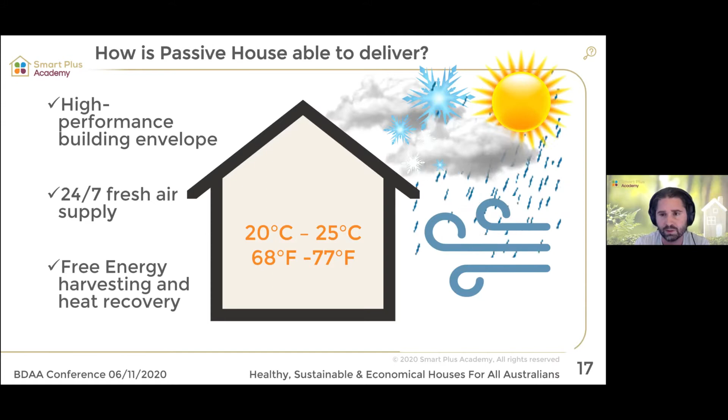So let us talk a bit about health. Why is health so important? Why is health and homes so related to each other? Because we're spending over 90% indoors and only 10% outdoors, and this indoor environment is not our natural habitat. It's an artificial environment that we are creating. So we must make that as healthy and comfortable as possible. That's the reason why health is so important, because we're spending our life in our boxes that we're building.

Then the next one, sustainability. When we look to the impact of the different industries, we see that the building industry has an impact of 39%. 17% is the residential building, 11% is the commercial buildings and their use, and 11% is the building industry itself to create our infrastructure and our buildings. This is the reason why the building industry is the solution to fight climate change. We are the solution, guys. You choose the field that is making the difference. We are the ones that are able to save the planet and make sure that the generations to come still have a planet like we know it.

Then the next one, economics. When we look to our buildings, we see that heating and cooling is 40% of our operational costs, and 21% is our hot water cost. This is exactly what Passive House is tackling, it's tackling the 40% and the 21%. Overall, Passive House is able to cut the energy, or the household running costs, by 50%.

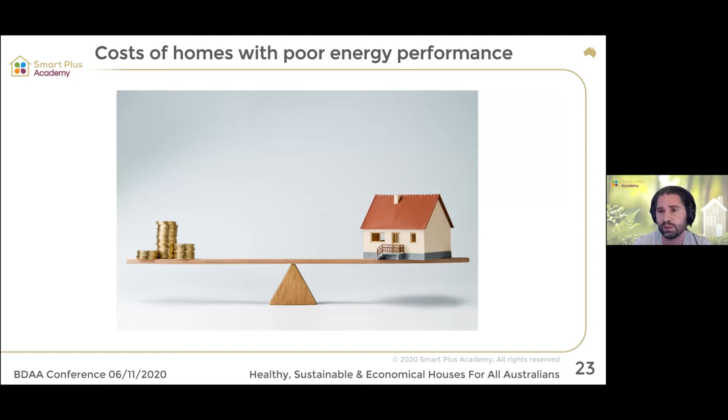So what are the findings of this paper? What's the cost of poor energy performance in our buildings? Obviously higher energy bills, and we see that with really simple upgrades, not even passive house upgrades, we're able to cut the prices down by 50%. In ACT, they spoke of a saving of $700 a year already.

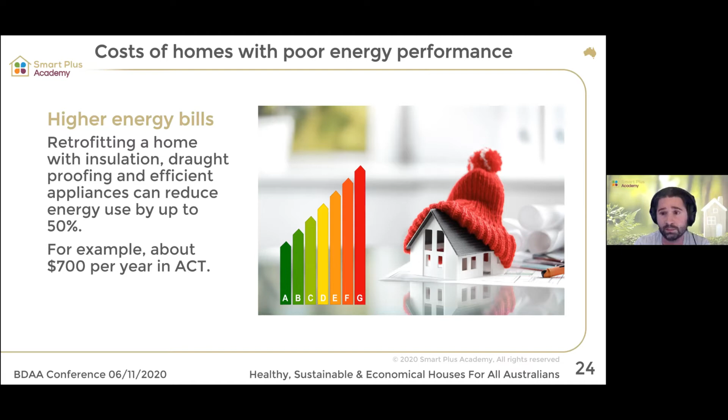The next thing we have to speak about, because it's related, is increased mortality. 6% of Australians die because it's too cold, and 1% die because it's too hot in their buildings. 7% of the deaths that are happening could be avoided by actually building passive houses. So it's something we need to talk about and really see. If you look at Sweden, it's only 3.9% compared to 7% in Australia, something is wrong there. The Swedish climate is far harsher than the climate here in Australia.

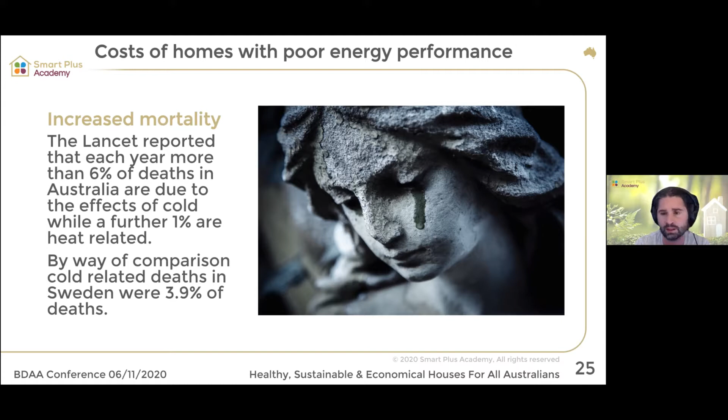Other impacts, when we look more globally, we know that 7 or 8% of the asthma burden in Australia, with children aged 14 or under, is associated with damp housing.

Again, like asthma, it's a little bit ridiculous. I figured out a few months back that I actually have asthma. I was wondering why I don't get energy, why I'm not feeling well, why my digestion system wasn't working properly, and I'm teaching that stuff. I didn't even know I had it. Then I just took this easy spray, and my life is good again. Asthma has a lot of aspects to it, there's a real mold related aspect and building environment aspects, but also a psychological one, though we're not going there in our presentation.

In New Zealand, New Zealanders living in insulated houses have a 50% less likelihood to have respiratory symptoms than those living in uninsulated houses. So we see people living in insulated houses, not even passive house, just really simple improvements, already improving by 50%. In Europe, we know there's a 40% higher likelihood to develop asthma if you're living in a damp and moldy home.

In the US, 21% of asthma cases reported are attributed to dampness and mold exposure in homes. So that's something we really need to be aware of.

Then there's the increase of public health spending. So we see here the spendings on the right. Asthma alone in the year 2015 was costing 28 billion - just asthma, 28 billion for treating asthma. And all the other lung-related diseases cost 98.2 billion in the year 2008. This is expenditure that our society is paying, and we can really reduce that by building better homes.

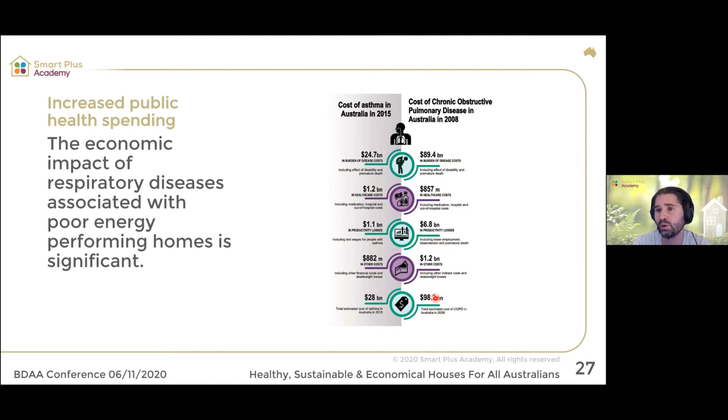So why are buildings so impactful? Because we're spending 90% of our time in there and only 10% outside in the natural environment. So there are only two health criteria that we need to fulfill in buildings. The indoor comfort needs to be no health risk, and the indoor air quality needs to be no health risk. So these are our two criteria that we need to fulfill.

So indoor comfort - let us talk about indoor comfort first. When we speak about comfort, we have to keep in mind that we are all humans with the same needs. What I mean by that is our body temperature. My body temperature is around 37 degrees, probably a bit higher right now with all this craziness happening. But it doesn't matter if I'm living in Sydney, Hobart, or Darwin - doesn't matter on the climate zone we are living in. We are humans, and our body temperature is around 37 degrees, and this is everywhere the same.

So comfort is health. Why is comfort health? Because first it's comfortable, then it's uncomfortable, then it's unhealthy, then it's a health risk, then it's a health threat, and then it kills us. Simple as that. Comfort means that the body sensors are telling us that we are not under stress. Comfort tells us that everything is fine with our system. Comfort is a health requirement.

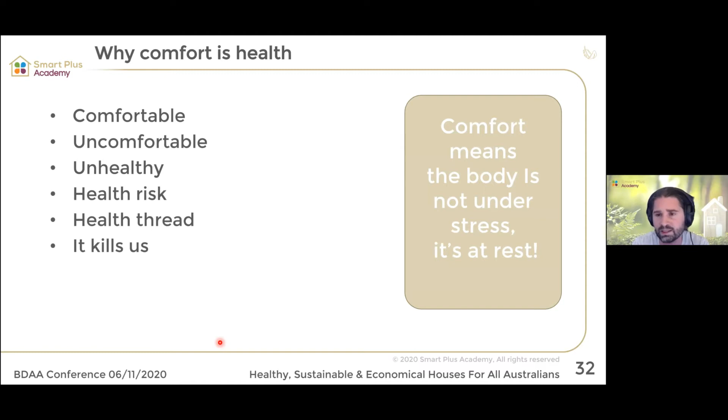We're all having the human needs, we're all having body temperatures around 37 degrees - it's not dependent on location - and we have the need for comfort. So what is comfort? Comfort is defined in the study by Ole Fanger in 1970.

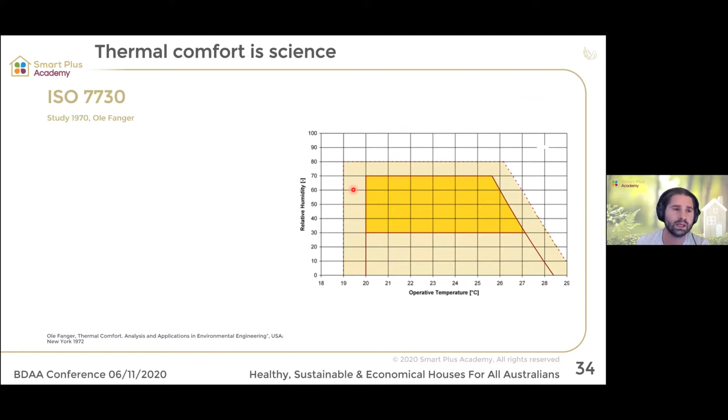He was putting a lot of people into an environment and then tested them. The outcome was that the comfort zone is between 20 degrees and 27 degrees, with a relative humidity of 30% to 70%. So what does the comfort zone depend on? Air temperature, radiant temperature, and relative humidity - these are the main ones that are really important.

In a passive house, we are stricter than the general comfort zone. We say in passive house that we stay between 20 and 25 degrees, and a relative humidity of 30% to 60%. Could you guess why we don't allow temperatures of 27 degrees? We are sleeping in that place, and the comfort zone is for awake people. If you're awake, you could be comfortable at 27, but if you try to sleep at 27 degrees, you're for sure not getting the rest. You might be able to sleep, but you're not getting rest and not able to recharge your batteries. So this is the reason why we only go up to 25 degrees.

And then the relative humidity is as well a comfort reason, but also a health reason, because 70% is too close to the mold risk at 80%. So there's another reason for only 60% as well. So passive house stays, like I said, between 20 and 25 degrees and a relative humidity of 30 to 60%.

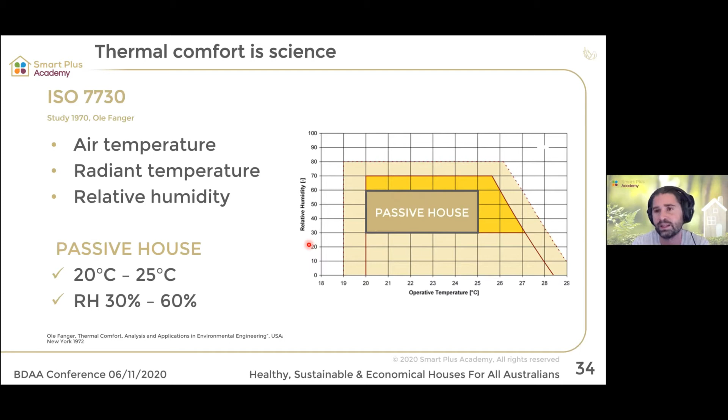So for thermal comfort, if you're staying in this comfort zone between 20 and 25 degrees, then 92% of humans are feeling comfortable. There's always a few people you can't make happy - we're humans, there's always somebody out there that's not satisfied. But with 92% satisfaction, we are already happy. Like I explained, sleep is why we're not going higher than 25 degrees.

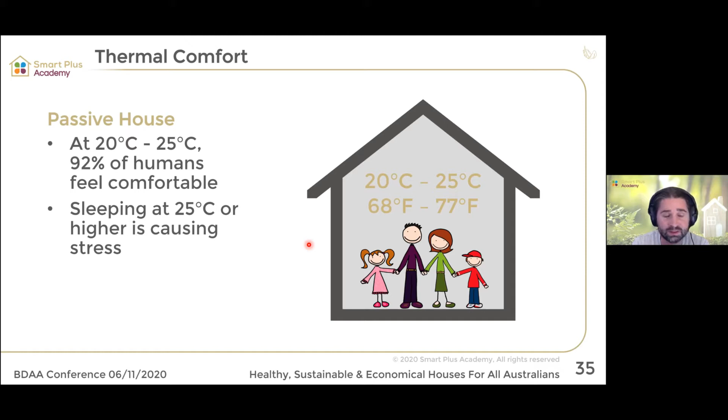So let us now go into indoor air quality. For this, let us see if that works. I would like to share with you a little video, and I hope that we are able to play that now.

You will decide how this story ends. This is a story about us, the indoor generation. A generation that spends 90% of its life indoors.

It all started the day we left nature behind. We filled our homes with lovely things and all the stuff we wanted. Our homes became places we would never want to leave.

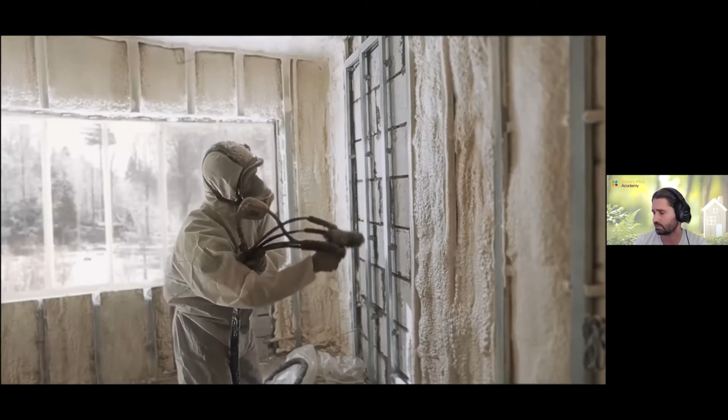Artificial light replaced daylight, and we built our houses so that nothing could escape. We cooked and showered, breathed and played, slept and sweated. But we had closed ourselves in to a point where nothing could get out.

So when the air turned bad inside, we tried fixing it with chemicals. And we put in little artificial suns everywhere to make the darkness bearable. That's when things started to happen. Hard to notice in the beginning.

Some needed help to sleep, to breathe, to not itch. Many of us even started to feel sad. So we turned on happy lamps to make the sadness go away.

Then, scientists discovered that the air inside our homes is up to 5 times more polluted than the air outside. And that the lack of daylight can affect children's learning and increase blood pressure. It turns out that kids' rooms often have the highest concentration of toxicants in the house. In fact, millions of homes are unhealthy to live in.

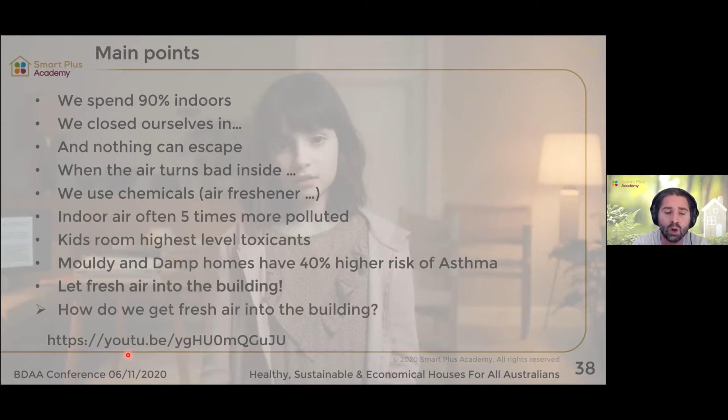So we have to let fresh air into the building. So how do we get fresh air into the building all the time? So now, how is the air quality in your home? Do you know it? Do you measure it?

Maybe something to consider. Yeah, so the air quality is something that we often don't even feel and notice. So it's something that we need to measure. Our senses are not designed for measuring air quality and carbon dioxide concentrations.

So there are now harmful substances, and we will cover mold, particles, and carbon dioxide. There are more of them, like the VOCs, radon gas, and odors.

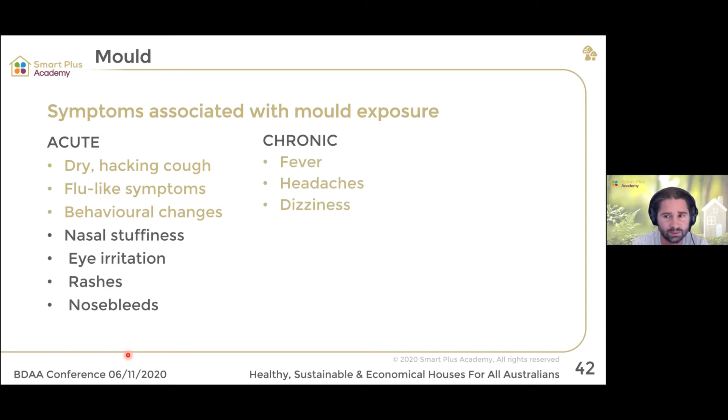Yeah, so for mold to form, there are only 4 things that are needed. It's nutrition—mold needs food. It's a living being, so it needs energy. It needs a source of life, it needs spores. Yeah, and we always have that around. There's always spores out there. There's always energy.

We could get rid of energy by living in a freezer, but that's not in our interest. We want to live at 20 degrees. Nutrition, there's always some dust particles around. So these three things are not really controllable. The only thing we can control is the moisture.

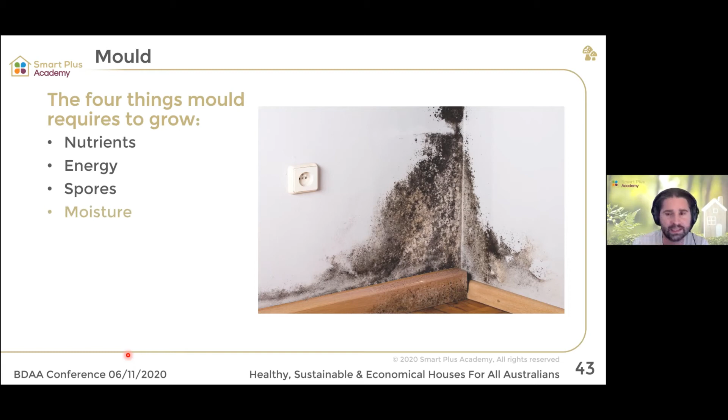And that's exactly what we do in a Passive House. So that mold can form, the mold risk needs to get high, it could form earlier. We need a relative humidity of 80%. In a Passive House, we make sure we're not reaching this 80% relative humidity, and that no surface or point has a temperature of 12.6 degrees anywhere in the building, because that's the temperature where we normally get the 80% humidity, and then already a potential mold growth.

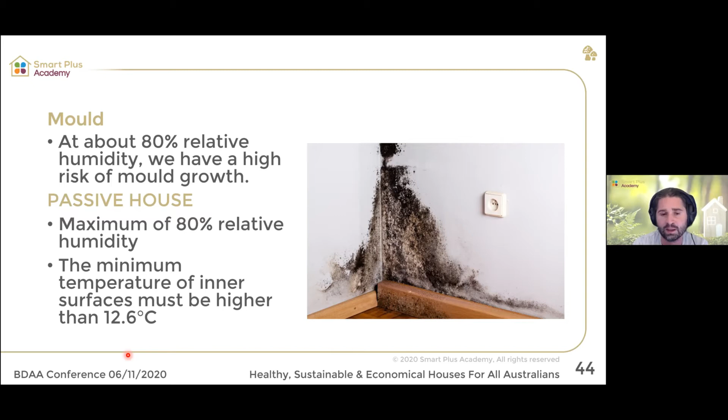Then other harmful substances, now the particle pollution. When we speak about particle pollution, something to talk about - now when we see masks, we're not necessarily talking about particle pollution any longer, thinking of other things, but I think it's still fitting.

So particle pollution - we can see here that diseases like heart attack and stroke are related to particle pollution, as well as respiratory diseases and asthma. We know that indoor air is causing 3.5 million deaths in the world, and 3.2 million is outdoor air causing it.

It's not looking too good for Australia. If you look at where the deaths are happening, obviously there's Asia in there as well, so it's not only Australia. But we really have to look out for that.

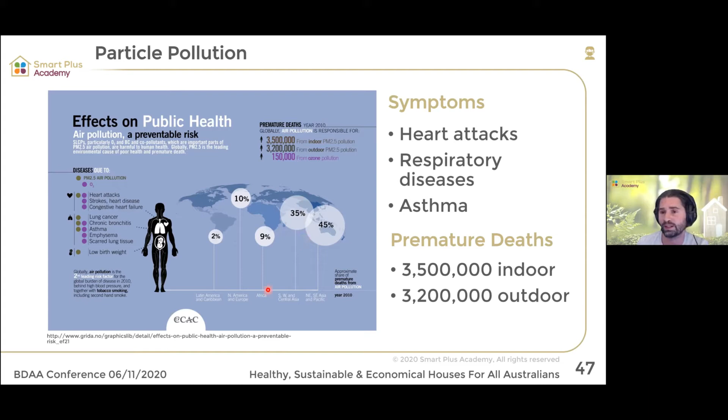So when we speak about particle pollution, we have to look at certain causes: cooking processes, cigarette smoke, exhaust fumes, tire abrasion, bushfires obviously, and dust storms. So mainly it's outdoor sources that are causing the particle pollution in buildings.

Now, a Passive House has an F7 filter that takes out particles larger than 0.001 millimeter in diameter. That's what a heat recovery ventilation system does - it uses an F7 filter to filter the air, so particles are already looked after.

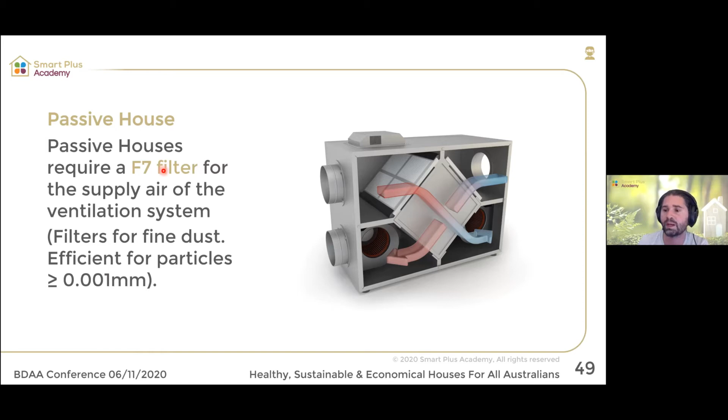One thing I want to point out is bushfires. Who didn't experience bushfires and problems with it? I was sitting in my apartment, my eyes were itchy, I had a cough, I didn't feel well at all when the bushfire season was on. And I had no control over my home or my office.

So we need to be able to separate the indoor environment from the outdoor environment to make sure that it is healthy and safe in there.

I don't know if you know, but we had false fire alarms going off in buildings, whole office blocks in the CBD, in the city of Sydney, and other places. So what did they do? They switched off the fire alarms because the alarm was going off the whole time, and it was before COVID, so nobody was going home, and home office hasn't been seen as an option. So now everybody is in a building with switched off fire alarms - or maybe it's not even switched off, but they say, yeah, it's only the smoke.

Imagine now there's really a fire - a 50-story building, and everybody thinks it's just a false alarm, or the fire alarm system is already switched off, or the fire brigade is busy because of false alarms around the whole city, and they're not coming to the real fire. So it's really something that needs to be discussed.

So here, this is my apartment in Manly, and you see here this 50 micrograms per cubic meter, this red line. Soon we are crossing that line, it's out of the healthy zone. So if we're staying below here, we normally say that's not a problem. Soon we're coming above that level, then we are in the unhealthy zone. And you see how that was going crazy - it went up to nearly 14 times the levels that would be seen as okay.

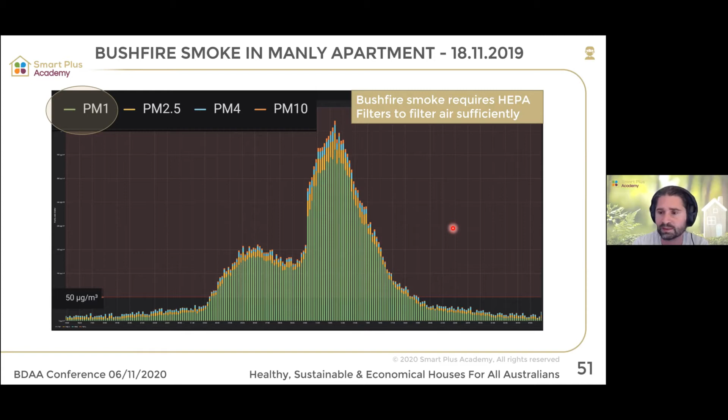So now, next one is carbon dioxide. Let us talk about carbon dioxide. Do you know your carbon dioxide levels in your building?

Probably not. The outer air has about 400 parts per million. We are now obviously at 420 already because the parts per million are increasing. We say normally in a building, 1,000 parts per million is good air quality, and above 1,000 parts per million we normally say it's harmful for us already. Above 5,000, we say it's toxic. So we still have some play before toxic levels, but above 1,000 we shouldn't be there.

So in a passive house, if it's set up properly, then we never have levels above 1,000 parts per million. Passive house is looking after that. So where is carbon dioxide coming from? Obviously from people, from animals, household chemicals, open flames like gas cooking, and cigarette smoke.

Who did not have that issue before, that you had 8 hours of sleep, and you woke up and thought, I don't feel rested at all? Could it be that your CO2 levels are a little bit too high, and that they're actually not giving you the rest and the oxygen, because oxygen is the fuel of life. That's the energy, where the energy is coming from. So if you're not getting enough oxygen, if you're not able to burn it, it's not working.

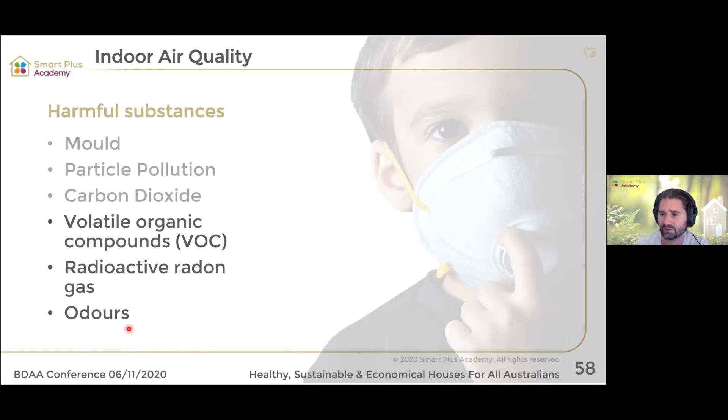So how do we get fresh air into our buildings, and how much fresh air do we actually need? From studies, we know that every person needs 30 cubic meters per hour of fresh air in the building. Window ventilation is not sufficient - this is already known. Going into the details would take too long, but you'll see that in the longer version on the website.

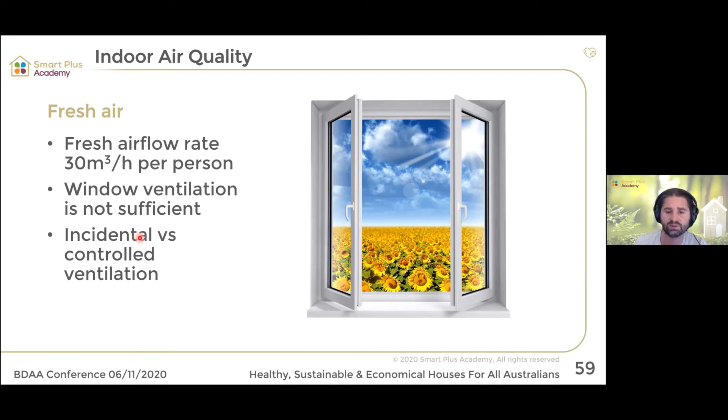Incidental versus controlled ventilation: incidental ventilation needs an incident, like a pressure difference between inside and outside, a temperature difference, or wind. We have an incident, but nature doesn't provide us a constant force we can use to ventilate the building, so we don't have controlled ventilation. For this, we need mechanical ventilation.

Passive House requires a heat recovery ventilation unit. Now we're getting provided fresh air 24/7, and the air gets filtered, reducing dust and allergies. Especially for somebody with allergies - hay fever is another thing I suffer from.

Obviously I want to live in a passive house as soon as possible because of knowing the benefits. All my clients that I've worked with in the past, and that I still have contact with, tell me their health issues decreased by living in nearly passive houses, not even full passive houses - their skin rashes went down, their asthma left completely, lung problems and coughing were all gone. It's pretty amazing, and everybody I was still in contact with had that experience.

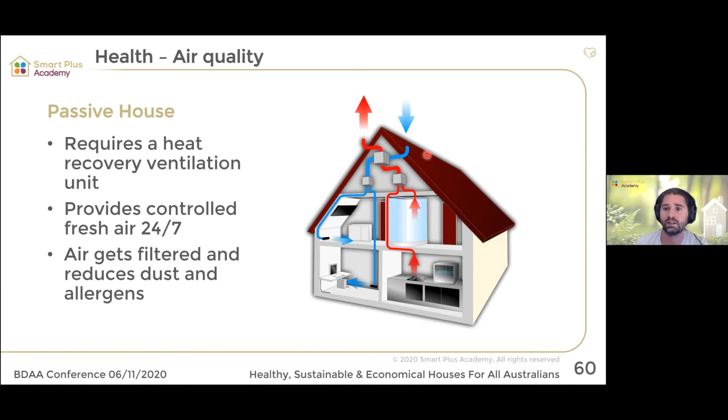So let us recap health for a second: we're spending over 90% of our time indoors. The indoor environment should not give any cause of health risks. The indoor climate must be comfortable - we need to stay in the comfort zone so we're able to get the rest we actually want. So let us now move over to sustainability.

You realize I spent a lot of time on health because a life without health is not worth anything really - it's really reduced. If your health is not well, then your life is really not there - you don't have that energy. So please look after your health, the only one you're having. Just reaching out to you again - I wouldn't like to hear that when I was in my early 20s or so.

Okay, sustainability. Let us go into sustainability, and I will make that now really visual for you. Probably you've never heard sustainability explained in the way I'm explaining it to you, and I think it's a really good way of looking at it.

When we're looking at the everyday impact of us, we know that looking at our landfills, every person in the world puts 0.5 kilo of trash into landfills every single day. If you're now looking at CO2, that's 15.5 kilograms of CO2 every single day that we're putting into the atmosphere - in other words, 31 times the rubbish you see lying around is actually going into the atmosphere. All the rubbish in your rubbish bin that you're putting out there - that's 31 times that amount going into the atmosphere.

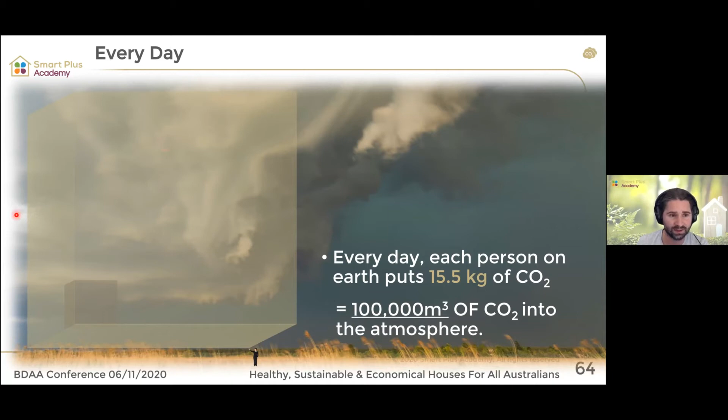You see this little figure here? That's a human. This cube that you're seeing here, that's the volume of CO2 that we're putting into the world every single day. This here is a 2-story building, this square. Yeah, this is the impact that we're having.

And people say that that is not having an impact on our environment. I don't know where they're living. It has to have an impact.

Now here in Australia, because we're living in the first world, we have to expect that we're putting 1 to 2 times our body weight of CO2 into the atmosphere every single day. This must change, guys. This really must change.

So we're always having this argument that the CO2 levels were always going up and down, and there's no proof of global warming, all this BS talk out there. Yes, it has been moving in the last 800,000 years up and down, from say 150 parts per million up to 300 parts per million. That is the shift that was naturally occurring.

Since industrialization was happening, we went up to over 400 parts per million. In other words, we added a third more CO2 into the atmosphere than what is normally naturally occurring. We're having a massive impact on our climate with the CO2 that we're putting into the atmosphere.

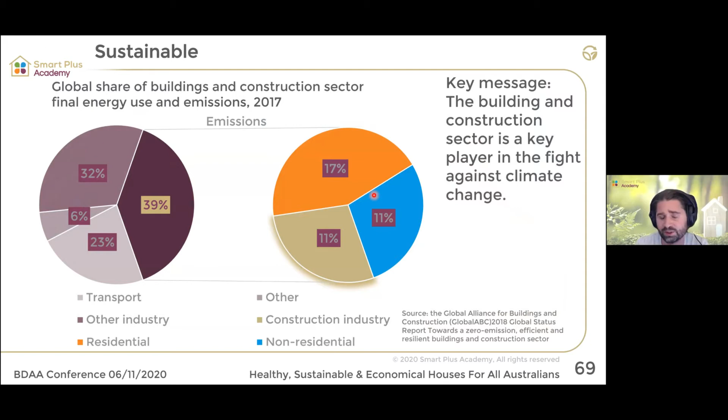So we are the solution. We can make a difference, and it's so super easy. Passive House shows it. It's not rocket science. We just have to do it.

And then we know as well that buildings are the biggest investment of our lifetime, and as well the biggest ongoing costs that we're having every single year for actually operating our buildings. So that is what Passive House is able to cut in half.

So when we speak about sustainability, we have to be smart. It makes no sense to get into trying to save the planet without being smart about it. We have to be smart, and smart means we have to think about economics.

And here we really have to speak about what it costs us. What is the cost of actually saving it? And here we come to reduce, produce, store. First we have to reduce, then we have to produce, and then we have to store.

Every kilowatt hour that we don't need to produce, and we don't need to store. And every production and every storage has losses. So reduction is the key.

Performance first, guys. The first thing that we have to achieve in our buildings is the performance first approach. That's really what we have to do. I said it already before, the building industry has the biggest potential for reducing CO2 emissions, not only from the quantity, but as well from the cost effectiveness.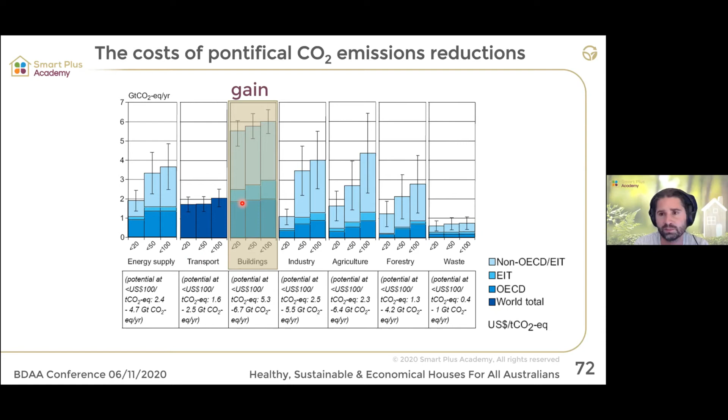So let us recap sustainability. Climate change is caused by us. Equal to 3 Hiroshima bombs of heat energy is getting released every single second in our oceans because of the CO2 that we put into the atmosphere, creating this glass house effect. Then the building industry and the use of buildings are responsible for 39% of the CO2 emissions.

What makes us the solution, guys? You choose the right field for your profession, if this is important for you, because here we can make massive differences.

Then energy savings - we can reduce the heating and cooling often by more than 90%. This is what we're able to do with the Passive House approach. And we can reduce the emissions by over 50% in buildings just by applying Passive House. We're gaining health and comfort. Passive House is the lowest hanging fruit to fight climate change.

Economically - so we're coming now to the economic side, and everybody is always saying Passive House is too expensive. It's total bullshit, guys. It's so not true. People that don't understand economics will say that, but Passive House is not expensive.

So let us look into the economics. Like we know already, buildings are the biggest one-off investment in our lifetime. They are the investment into our future, into our retirement. They're often seen as an investment, so we need to look at them as well as investment on that side.

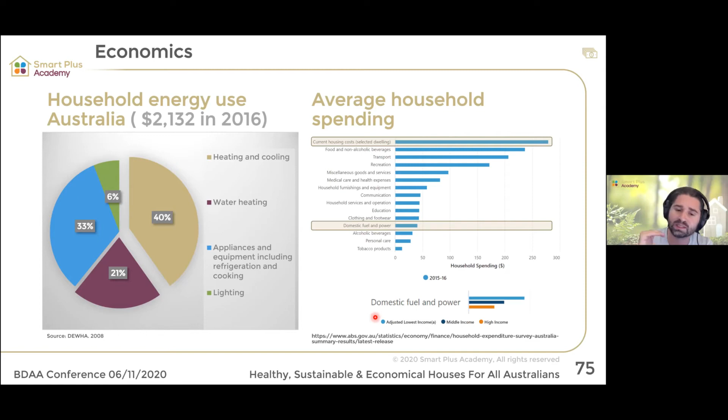So Passive House is ideal for social housing - it must be Passive House. Passive House is the lowest standard that we should build to, not the best standard. It's the lowest standard we should be building to. And Passive House can cut household energy in half.

So your home is the biggest one-off investment, the biggest ongoing cost - mortgage fixed and running cost, high fluctuation - and where you spend most of your life. You're spending 50% of your time in your home, and over 30% of your time in your own bed. The bedroom is the most important room in your building because you're spending so much time there.

Okay, so Passive House economics - let us talk about the low risk investment. Passive House is a low risk investment. Why? Because you're investing into quality. Passive House is quality. The difference to investing into quality is now burning fossil fuels - burning your money - instead of investing into fuel, into energy efficiency.

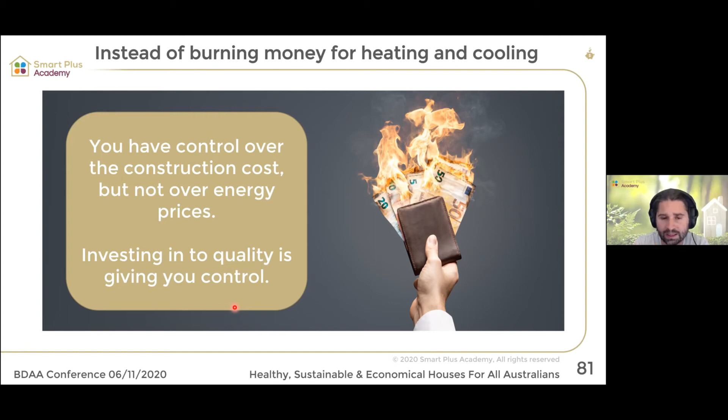And as well, when we're investing into quality, into performance, we are reducing the risk of fuel poverty. In Europe, we talk a lot about fuel poverty, that people are not able to heat and cool their houses any longer. Like in the UK, it's a really common thing that people can't heat their whole house, so they're only heating one room.

Here in Australia, I know families in the summertime, they're all sleeping in the sitting room because that's the only aircon they can afford to run, that split system in that room. They can't cool the whole house down, so they're doing that out of survival - the whole family sleeping under a small split system. I don't want to sleep with a split system running anyway, so it's not a solution for me.

In Spain, you have the older generation going into the shopping centers because they're climatized, they're cool. So now in the summertime, they're going in there to cool down. But what will happen if they're not healthy enough to leave their building any longer and they can't afford it?

Yeah, it's a death sentence. So we really need to look into that. And then there's a limited amount of breaking parts. Like here, this is what we're trying to do in the moment. Okay, we are losing something here, put something in here. So a lot of technology in there, and all that things could break.

A passive house, we just have a heat recovery ventilation system, a split system. You're using the sun, happy days. Like really low tech technology we can use in passive house. So it's a completely different approach.

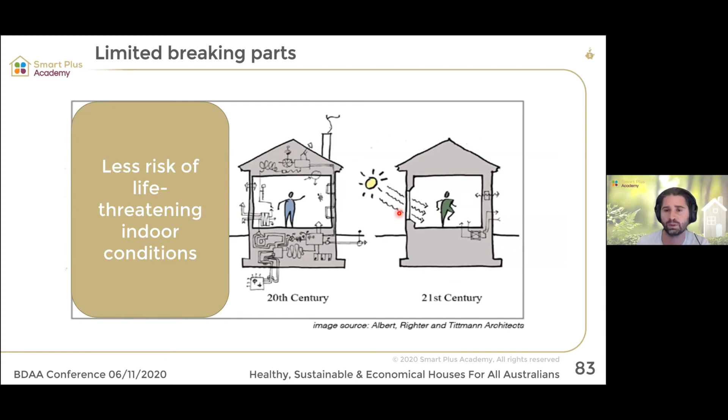Then it's a long-term return of investment. So long-term return of investment, in other words, passive house is your ideal investment into the retirement. Yeah, so it's the ideal investment.

So if you're looking now at a normal house that is operating at a temperature between 20 and 25 degrees, we can't compare apples with oranges. If you say now we look at the normal house that is not heated and cooled, but the temperature is now ranging from 8 degrees to 35 degrees, sorry mate, that's not comfortable. That's a health threat. So we have to compare apples with apples.

So that's the reason we say we look at a normal house that is operated at 20 to 25 degrees. We say it's a 200 square meter house and our energy cost increase is just 2% per year. So if you say our annual heating and cooling cost is 3,500 and our additional energy cost is 3,500, that's now operational costs for your fridge, your cooking and all that bits and pieces. So now we're coming here to $7,000 in year one.

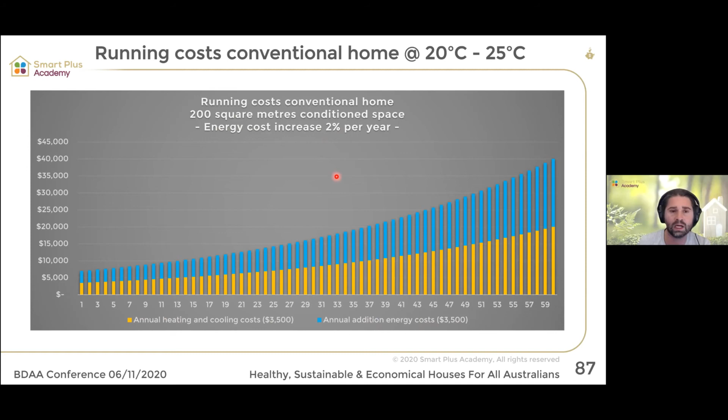After 60 years, we're already up here at what's that? $40,000. Yeah, so this is what is happening if you're building the way that we are living right now, and if you have an energy increase of 2% per year.

So massive. Now, when we compare that to passive house, so we have these lines now in, these lines are the normal house. We see now the impact of passive house. Passive house obviously goes up as well, but we see now that the operational costs, like the annual heating and cooling costs, they are super, super small. And they nearly have no impact on the overall costs.

That wouldn't be fair because let us be honest, passive house has higher building costs. If you have single glazing and you go for double or triple glazing, obviously we have to pay for that. If you're going from a building that has no air tightness and we're putting air tightness in there, that costs money as well. Then obviously we're having as well something like thermal insulation, probably adding a little bit of extra cost. So we have to acknowledge that the building materials we have to buy, there are additional costs.

However, if we keep doing it, the planning and the execution gets better and better and better, so that the administration side of the costs, like doing things again and again and again, planning costs, execution costs, from not doing it perfectly planned, they will be reduced. So overall, a passive house actually could already be neutral or even cheaper than a normal build, because you solve the problems before you go to site. Problems are not solved on site, they're solved up front, and you're getting all the knowledge involved up front.

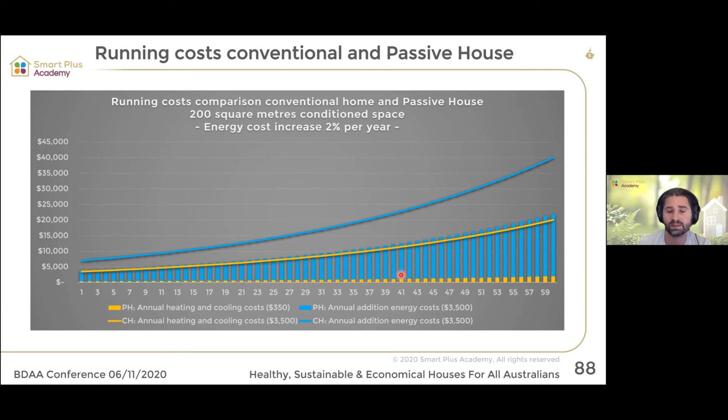But if you're just saying we are having now additional costs for a passive house, because obviously there are additional costs. So now I'm saying here we're having an additional cost of $50,000 for passive house. That adds $250 per square meter. That's the additional cost of passive house, and that is easily achievable. And we say that the loan rate is 5% in 2020.

So you're paying for your loan 5%, and we're having a loan period of 30 years. In the first year, we have additional costs, pretty much the same as a normal build. When we add the operational costs and the additional loan we have to pay off, and compare that to the operational cost of the non-upgraded house, we see there is nearly no additional investment. So overall, passive house is not costing you more, but instead of having this high risk of fluctuation of energy prices, you are investing into quality and having control over your economical freedom.

Like it's simple as that. So, additional free investment: your annual heating and cooling cost savings is $3,150, loan period is 30 years, and the total heating and cooling cost savings over 30 years is like $100,000. Like it's simple as that. And then loan interest rate is 5%. So in other words, we're having free $48,000 available to invest into the building without additional financial burdens in the first year.

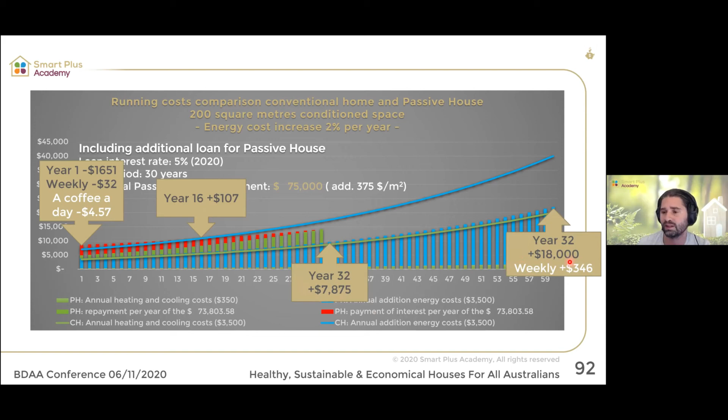If you're saying now 60 years, it's $18,000 additional in your pocket. It's a massive amount of money additional in your pocket. In other words, this project would have saved $365,000 in 60 years. Now, when we speak in this bigger planning idea, and speaking of a society, if our society is able to spend, every household is able to spend another $365,000 in the 60 years, this is a massive boost for the economy at the end. Like this boost is extreme, and we paid it off after this 30 years. Yeah, and now every household has $18,000 in their pockets. Like, come on, spending another $18,000 per household in our economy, that will boost us dramatically.

And that's not for bloody burning fossil fuel. It's now for quality time, for probably having a physio, having your health looked after, having a holiday, having more efficient materials and things like that out there. So yeah, it is up to you. Do you want to have your coffee, or do you want your health for your family, for yourself? Do you want to have the sustainability for yourself, for the generations to come? And if you want to make money, it's up to you. Coffee or all the other three things. Yeah, so it's up to you.

So for the additional financial burden of a coffee a day in the first year, guys, only in the first year, your family is living now in a healthy and sustainable home. You're getting rid of your second mortgage, the heating and cooling bill, and you're making an ideal investment into your retirement. It only makes sense, guys. Financially secure, so now it's financially secure. So we're already having that situation where banks like Bank Australia are giving you a lower interest rate for your loan when you're going for passive house.

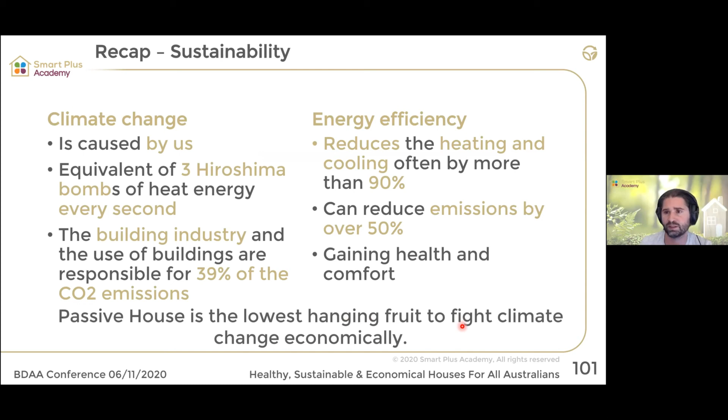Energy efficiency reduces heating and cooling often by more than 90%. You can reduce emissions by over 50%, and you're gaining health and comfort with the whole thing. A passive house is the lowest hanging fruit for fighting climate change. Recap economics: you're investing into quality, you have a calculated risk, you're staying within your financial means, and for minimum or no additional financial burden, you're getting your free holidays and your returns on investment.

So what can passive house deliver? Air quality, passive house is the solution. Comfort, passive house is the solution. Sustainability, passive house is the solution. Economics, passive house is the solution.

We have to go to energy producers so that our buildings become the power stations of our nation. The energy storage needs to be looked after, so our buildings could become energy storage. Then we need to get net zero energy buildings, and then we need to become fully zero energy buildings - because this net stuff and fully energy, none of that is defined, it's only described, and what is net for you is not net for me, what is full for me is not full for you.

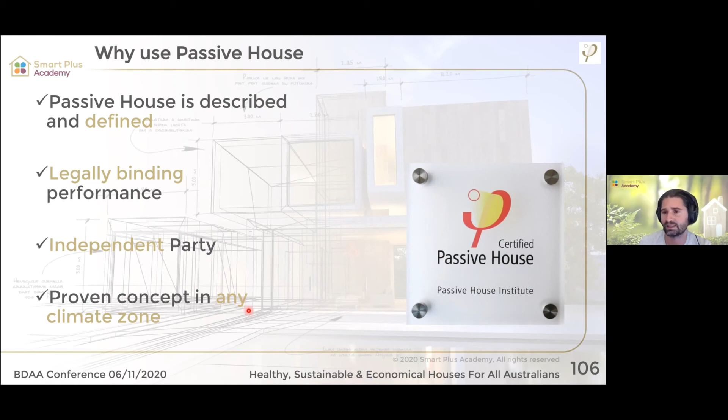So guys, it's our responsibility as professionals in the building industry, because our industry is the biggest driver for climate change, and people spend over 90% of their time indoors, and we are creating these environments. So it's our responsibility, and it is as well us - we are the solution.

And we are able to improve the health of people out there, and we are able to really fight climate change at the same time. That's what we're able to do.

So now with us, like I said before, we are offering the courses. When you do the courses with us, our standard is that you will get the best Passive House course ever delivered in Australia. Maybe soon we have to change that from Australia to globally. But that's our standard. We always improve. There is no perfection. Perfection is the low standard, because otherwise you think you can't improve it. So we always go there.

So what is the Passive House Design Mastery? That's what we're having now. That's the normal Passive House course, what other Passive House course providers provide as well. Normally 8 days. The first 5 days is the Passive House concept. The next 3 days is then the implementation of Passive House, the way that we structure it. And then we're having exercises and recordings of those exercises with solutions, so you can go through them. Then you're getting homework, and not a little - you're getting 1 to 3 hours of homework every single day. In other words, these 8 days is the same amount of work you would do in a 1-year master's degree.